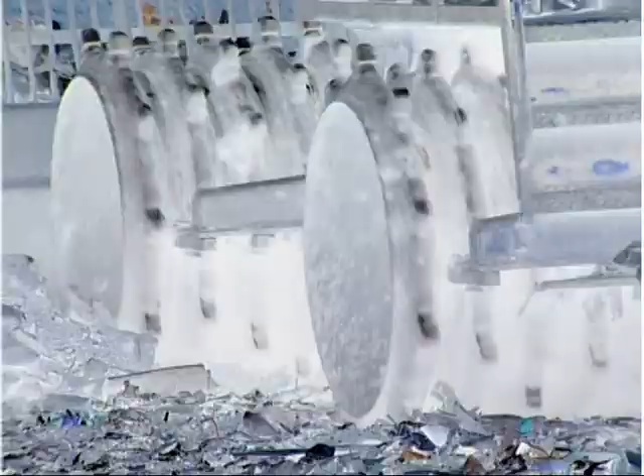It does make sense to learn from past mistakes, but it only makes sense to learn from established facts.

Waste burning is one of the safest and simplest ways of dispensing with refuse in an economical, sanitary and environmentally friendly manner. BRESSON, the makers of solid waste incinerating plants.

Should waste be dumped or burned? Waste should be burned because dumps take up space. Waste gets wasted on a dump, it's better to burn it in the plant. I'd prefer incineration, an incinerating plant. Burning is better, let's burn waste. Burning, of course, when it's burned down to molecules.

If you make a landfill and cover it with earth, it may explode in 50 years, or do something one wouldn't really expect it to do.

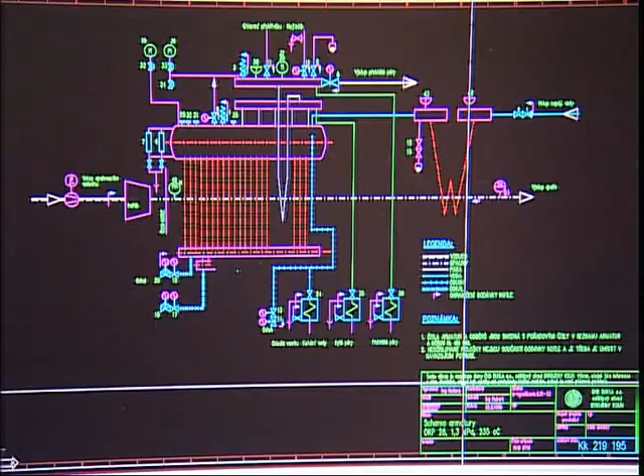In July 2002, the joint stock company BRESSON AS took over the production programs of ČKD Dukla AS and Strojírny Kolín Fram. As a successor to ČKD Dukla, we've been supplying engineering goods for over 165 years.

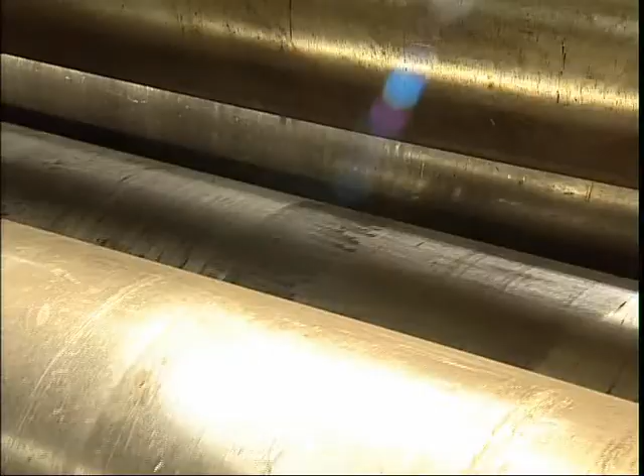In the early 1970s, we developed a range of packaged transportable boilers and produced a boiler with a capacity of up to 240 tons per hour.

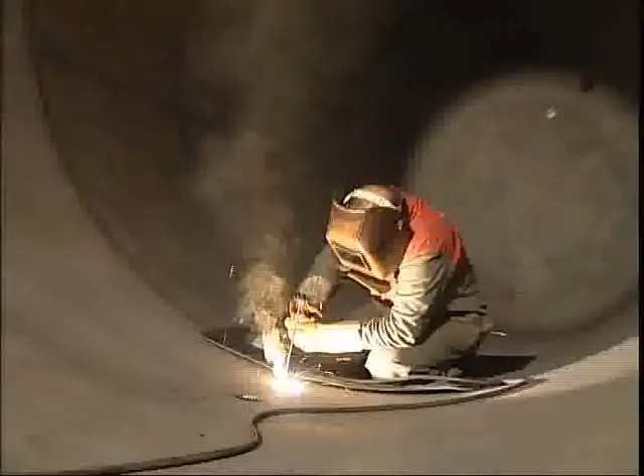In the 1980s, we took up a more promising product, waste-burning boilers. We can design and build boilers with various specifications intended for various types of refuse.

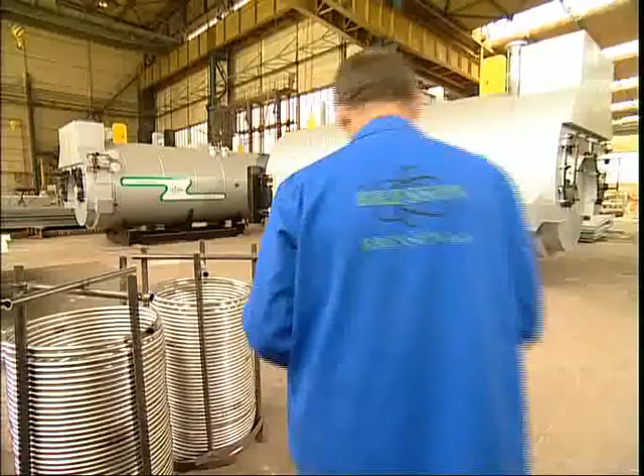Waste burning is a modern method of using or removing refuse. It's just as costly to remove waste as to build a modern incinerating plant. When waste is burned, heat is released that can be used to generate electricity or supply it to the network.

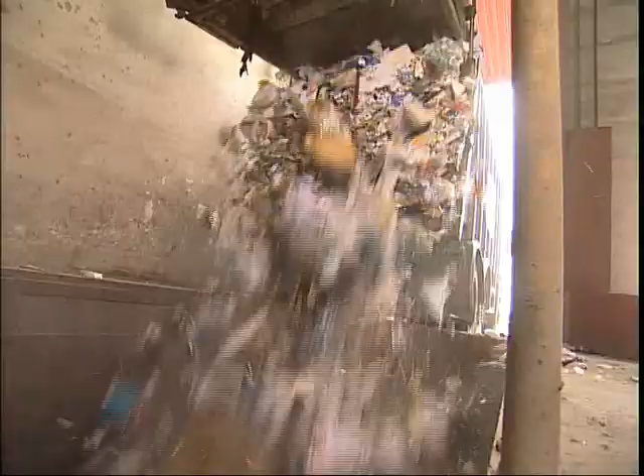Waste is delivered to the plant, is weighed and dumped in a storage bin that can take up to around 6,000 tons of refuse. Bulky waste is dumped into a special gate with shears that cut it down to size.

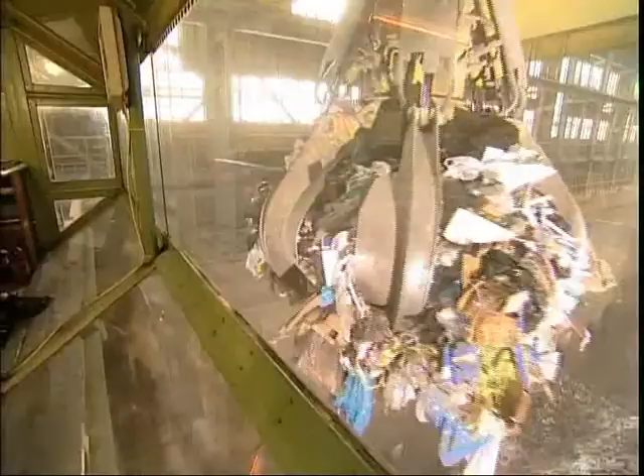After homogenization, waste is grabbed by a crane, dumped into boiler hoppers and hydraulically fed into the grate of the boiler.

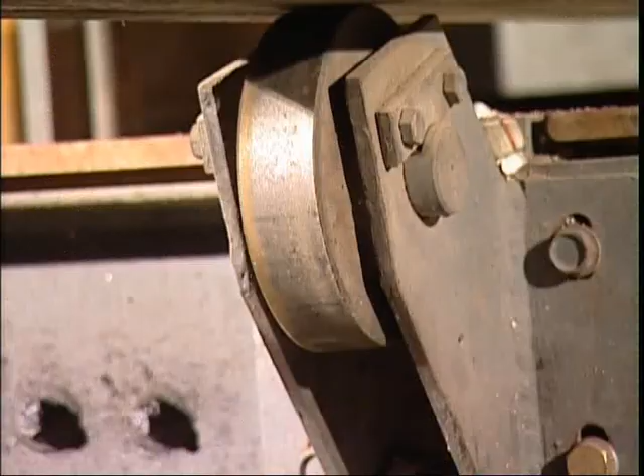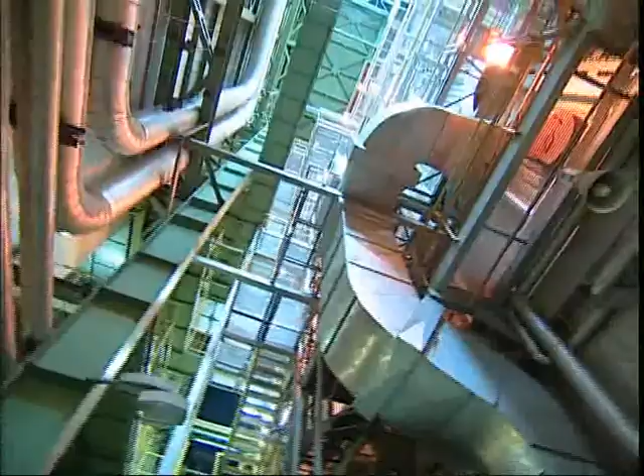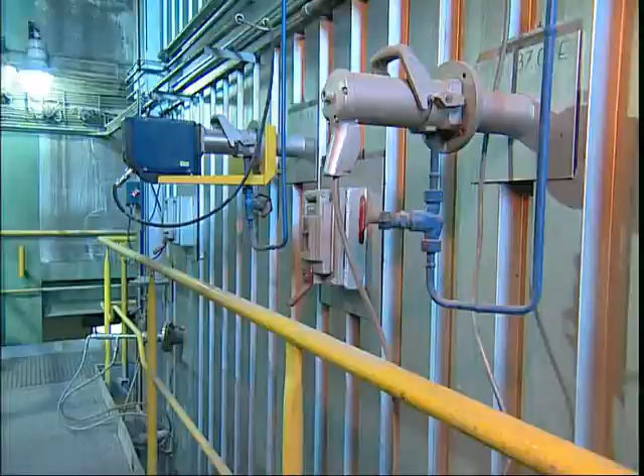Stoker-fired boilers have a burning capacity of up to 6 tons of waste per hour, and cylinder-grate boilers with slanting furnaces can burn up to 15 tons an hour. Waste is burned at 850 degrees Celsius. By burning 15 tons an hour, the boiler will produce about 36 tons of steam at a temperature of 230 degrees Celsius and pressure of 1.32 megapascals.

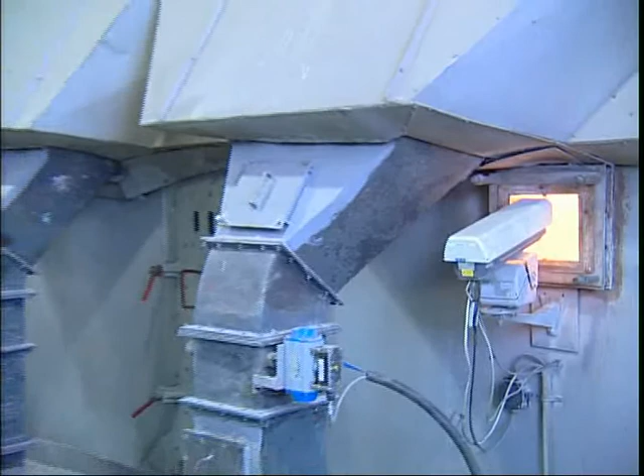The delivered waste gets burned down to about 10% of its original bulk.

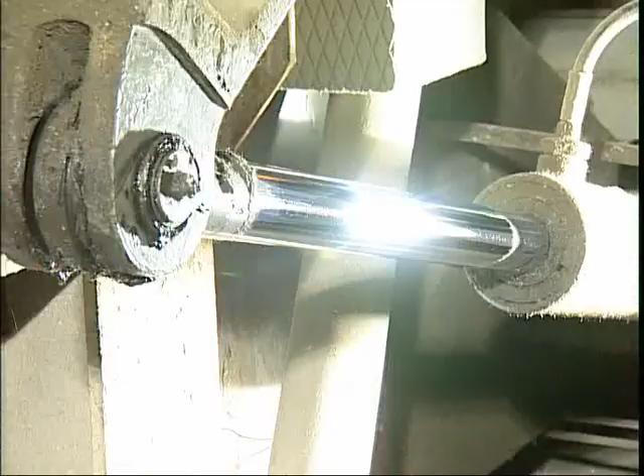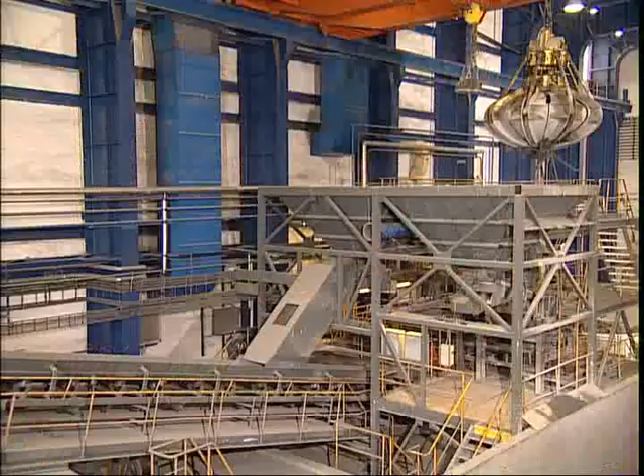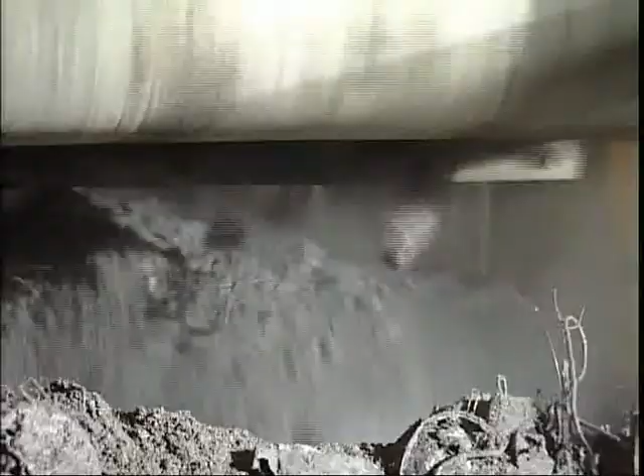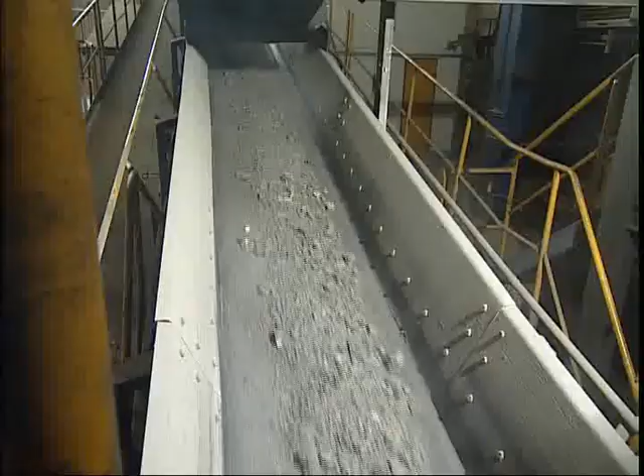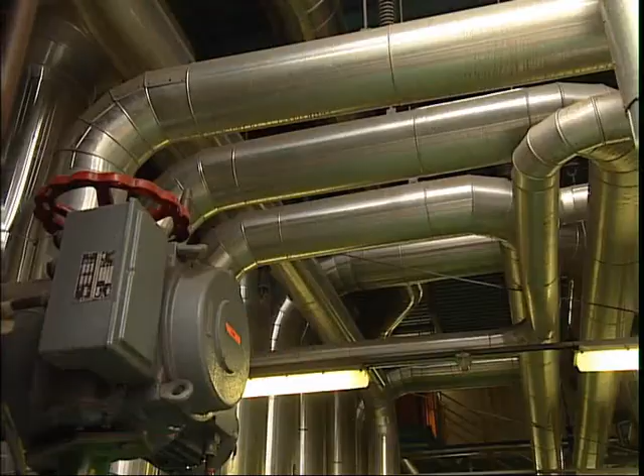Annual output of steam and heat supplied to public supply mains roughly equals 1.2 times 10 to the 6th power of gigajoules. Steam is distributed via pipelines.

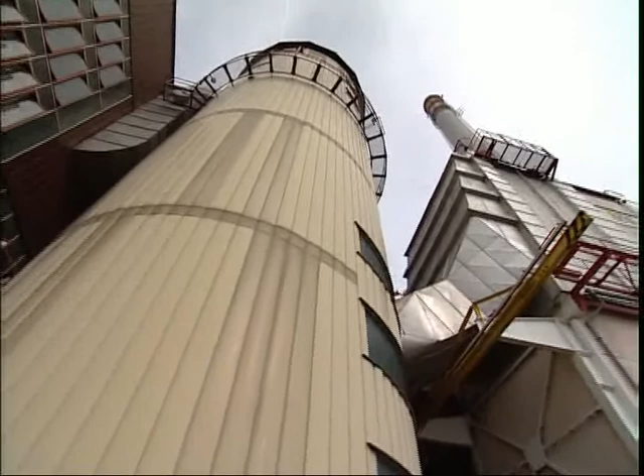A 3-chamber electrical gas flue separator cleans combustion products to mandatory emission limits and a residual dust particle amount of 30 milligrams per 1 standard cubic meter.

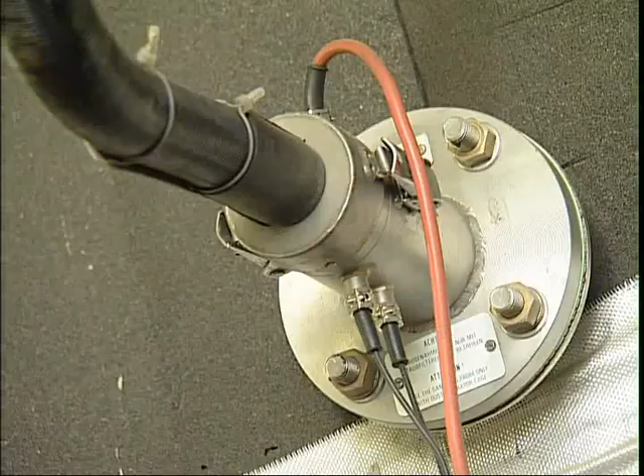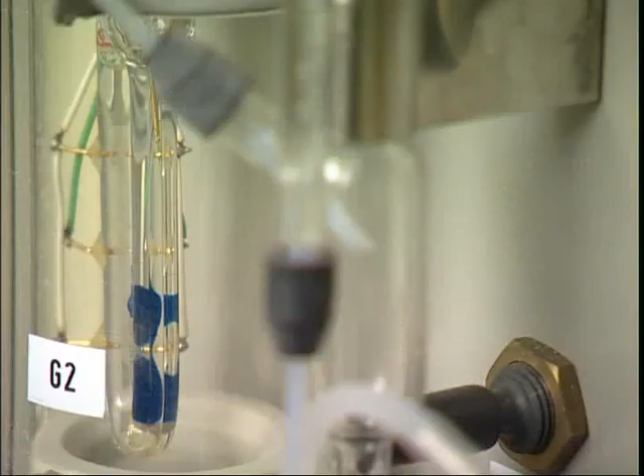Clean flue gases are continuously checked on outlets by means of special probes installed inside the smokestack. The signal is fed via a computer to a control room that oversees the whole combustion process and the purification of the combustion products.

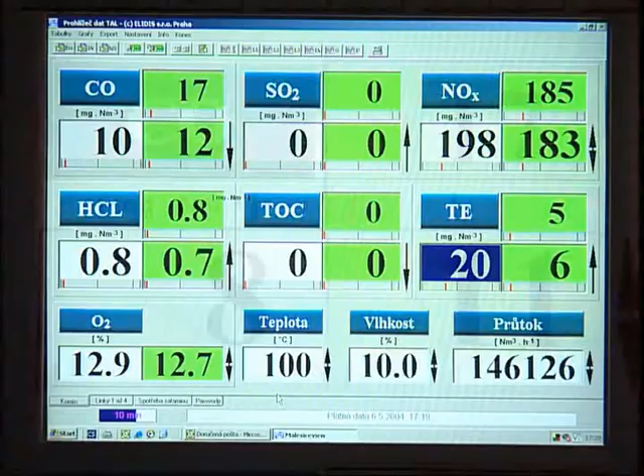Building waste incinerating plants is a fairly easy job, as evidenced by the Vienna plant that fits snugly into the architecture of the Austrian capital. Plus, it is an architectural gem by itself.

This goes to show that refuse incinerating plants may be built anywhere in terms of both refuse supply and the transfer of energy to the customer.

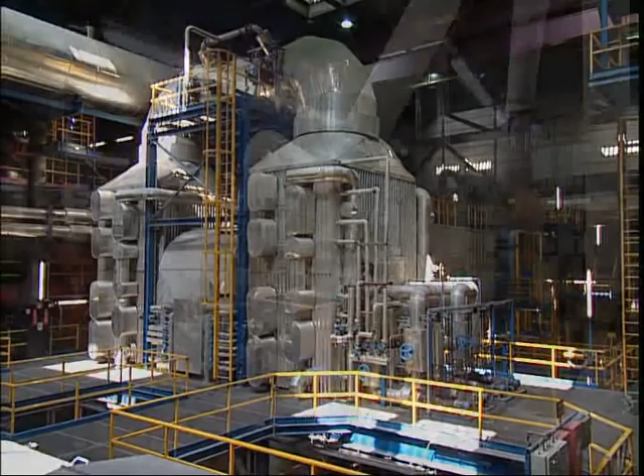The extreme longevity, reliability and friendliness to the environment, all this adds up to superb net profits.

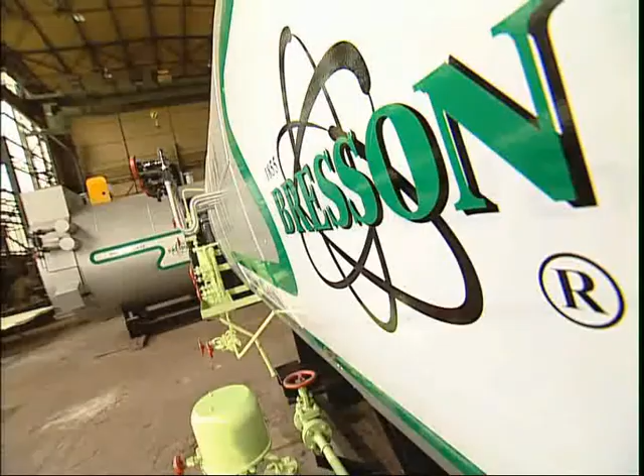BRESSON have a superb team of experts in engineering, production and sales matters. This gives good guarantee of the firm's ability to deliver orders in required volumes and quality. BRESSON is a general contractor in the field of modern refuse incinerating systems.